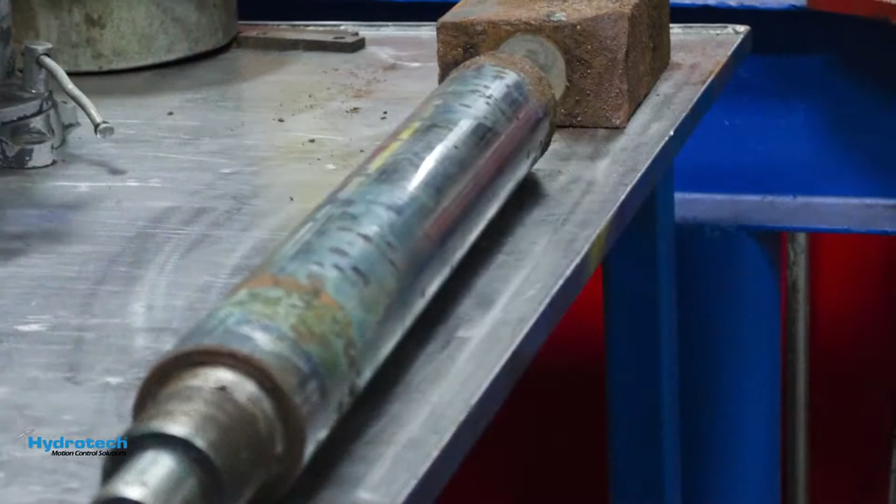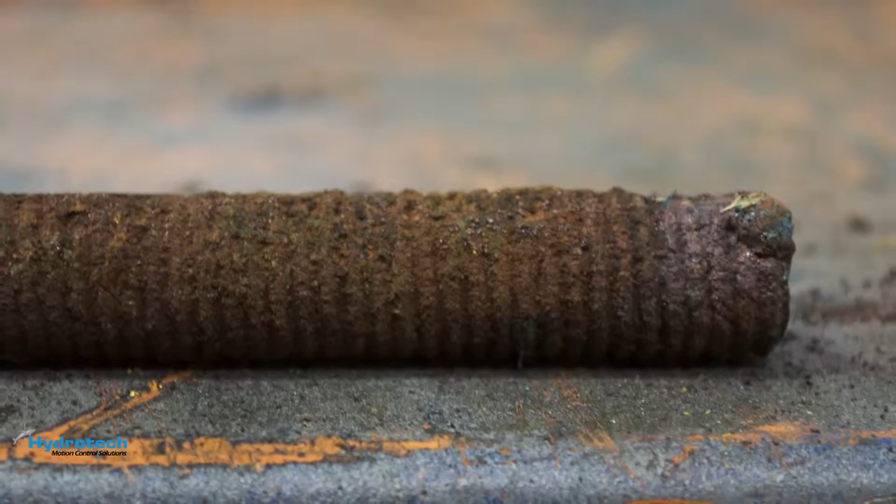The cylinder was crucial to his company's manufacturing process. Without it, an essential machine would be down, costing money and slowing down the completion of jobs for paying customers. To further complicate the situation, the original cylinder manufacturer was no longer in business, which left the customer with limited options for repair.

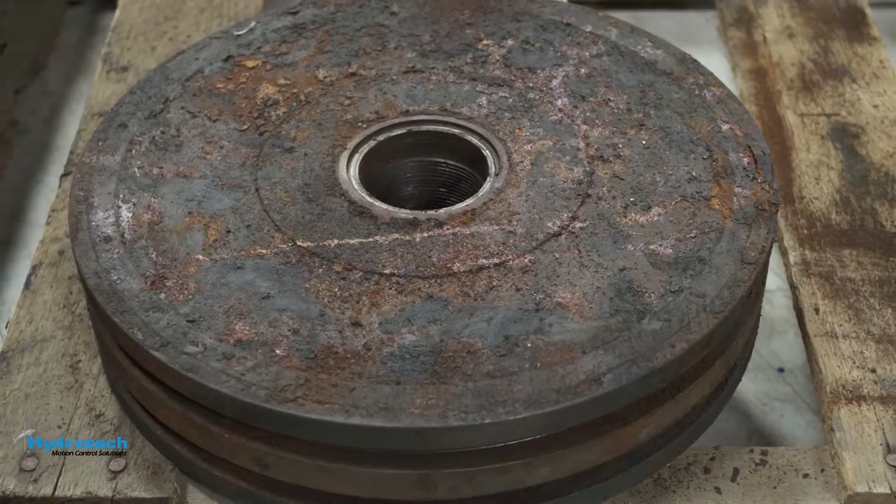Purchasing a new custom cylinder would be expensive. A new hydraulic cylinder generally costs three times more than the cost to repair an existing one, so repair was the obvious preference. Fortunately, Hydrotech Incorporated's service and repair division was fully capable of remanufacturing the custom cylinder.

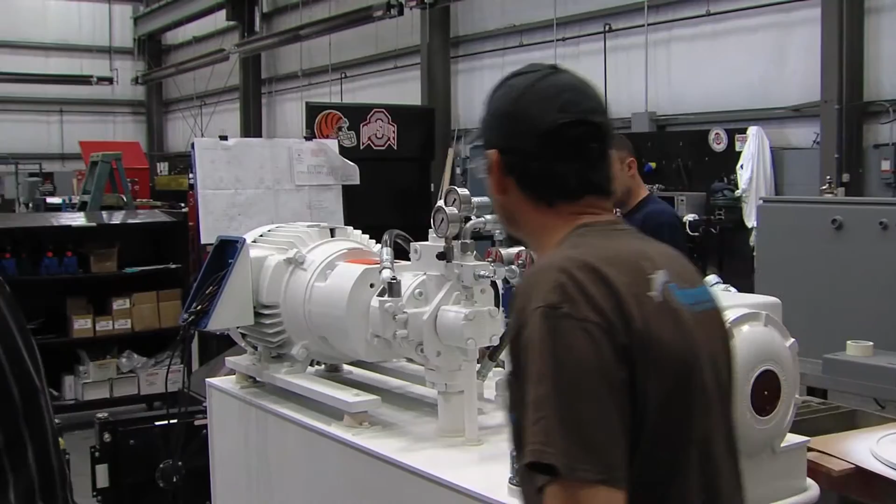Not only do we do the engineering side of it, but we also do the distribution side. We do a lot of integration between the products and the controls for a complete turnkey solution. We're involved in not only design and assembly, but also installation and commissioning of systems.

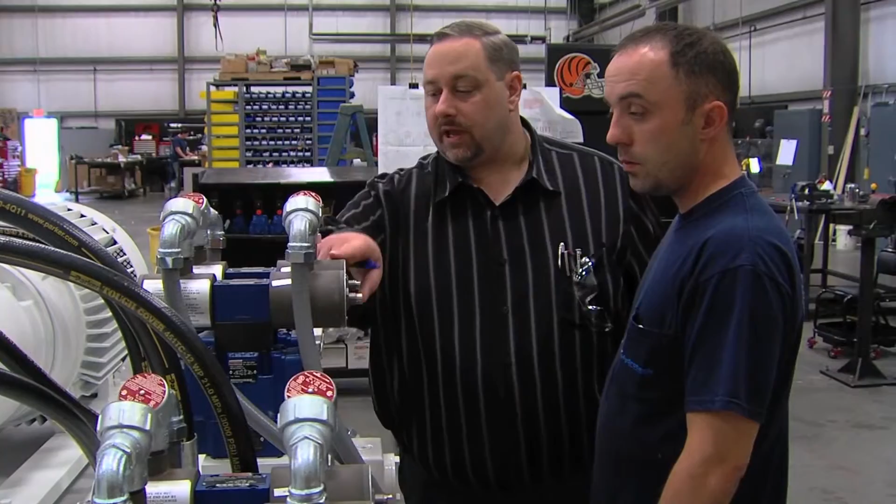So we try to work very closely with our customers, and it's to their benefit and ours to partner in the final solution. We understand that performance and value is really what's important to our customers. We have to help them set themselves apart from their competitors, and being creative and innovative has kind of been in our DNA since the beginning.

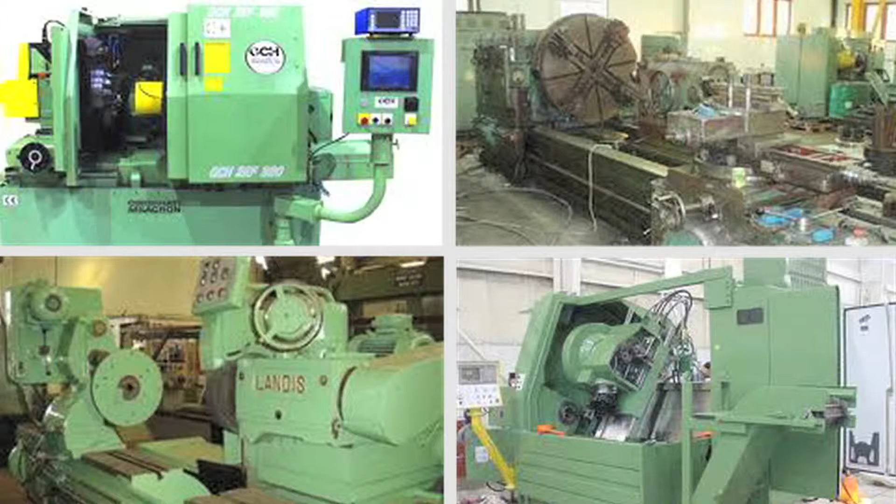I started Hydrotech on April 8, 1967. When we first started, it was just a sales company, and of course early on I was the only employee. The major industry in Cincinnati at that time was machine tool, so I focused in that category.

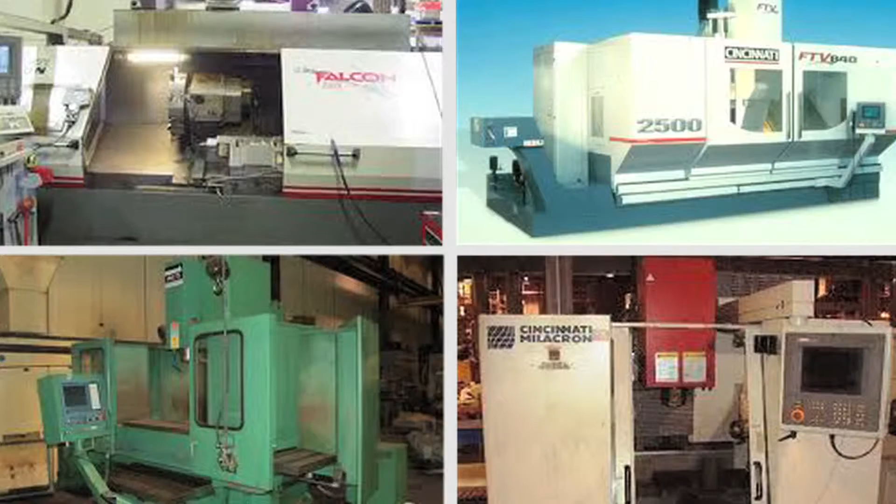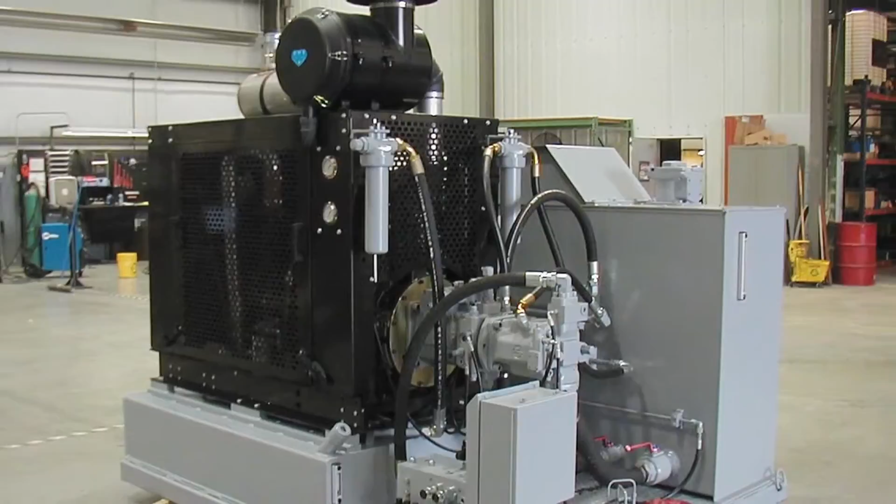Initially you start out with product lines that aren't well known, and then if you have some success, other manufacturers start to notice and approach you wanting representation of their products. That was the stair-stepping to get to more familiar product lines and growth. That's what really moved us into the systems arena, and it continued to grow from there.

Hydrotech is a regional company. We operate in Ohio, Kentucky, some of the border counties of Indiana, and also the border counties of West Virginia. This facility here is about 50,000 square feet. We have another stocking facility up in Cuyahoga Falls, fully staffed, that can do the same operations we have here.

As a matter of fact, one of our divisions, DHP, which is the compact power packs, is based out of our Cuyahoga Falls facility. That's where all the manufacturing for that particular division is. DHP was developed because we realized there was a niche market for small power packs.

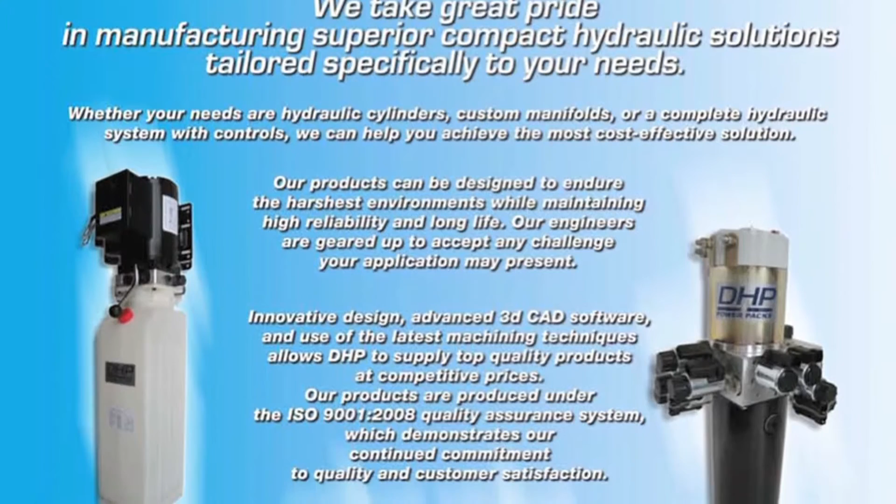So we focused on a market where we could do a total unit as an integral part of a particular operation or machine, and the progress has been nothing short of phenomenal. We started out mainly in the fluid power end of it, the hydraulics and the pneumatics.

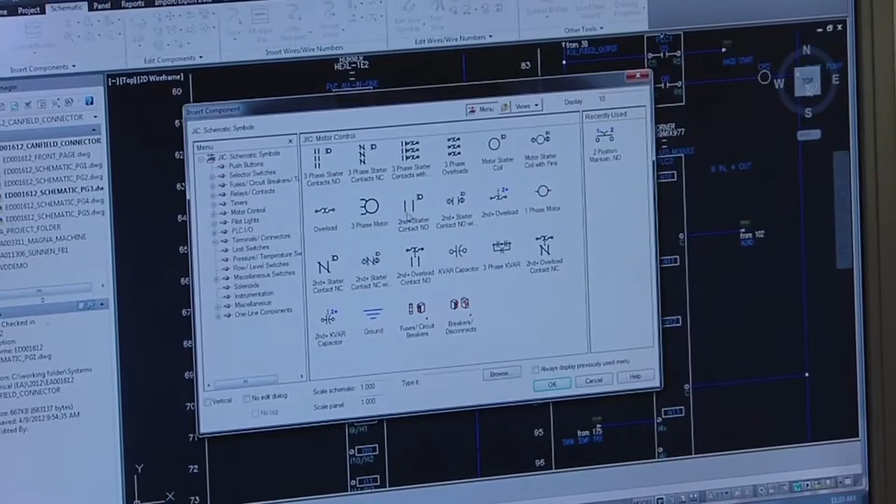But now that we have all of the technologies and disciplines, both hydraulics, pneumatics, electronic motion, and the controls, what we say is if it moves, we can help. The technology change in this industry is similar to what you'd see in the computer industry, because computer controls are being applied to the machinery we are designing for.

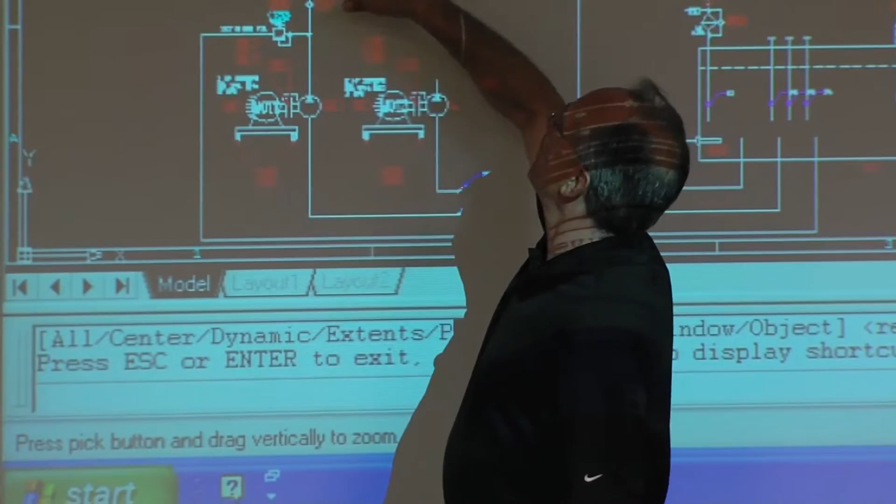So what we do here as a company is have our engineering staff involved in an ongoing training process to understand the new technology, and how we want to apply that to create energy savings for our customers and reduce our carbon footprint. A lot of the new products and new technology is designed to be able to do that.

Environmental concerns here at Hydrotech are very important, and we've taken some initiatives in the way that we operate to become greener. We changed all of our lighting systems over the past few years.

We're on a recycling program and looking at what's necessary to get the ISO certification for being a green business. But it's also important that we have expertise we can provide to our customers, because that seems to be more and more important today.

When the initial customer contacts Hydrotech, it's either directly here in this facility or through sales. Typically it's through sales. We have a project management system, a software program written by Hydrotech for Hydrotech, completely proprietary. Everything we do from the initial contact goes into that project site, and a project is created. Every bit of communication and information associated with that project is recorded within the project site.

So all of the drawings, all of the discussions back and forth between the sales force and engineering, all of the discussions between engineering and the customer, any meetings generated in relation to that project, are all recorded within that project.

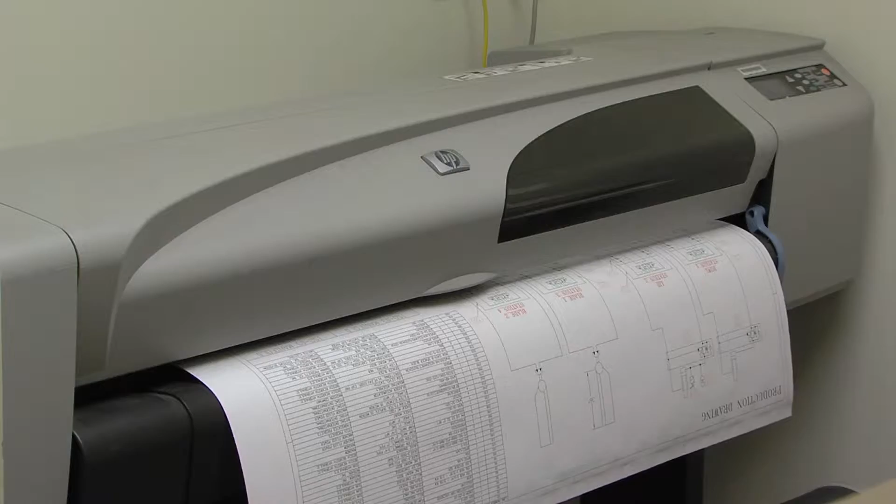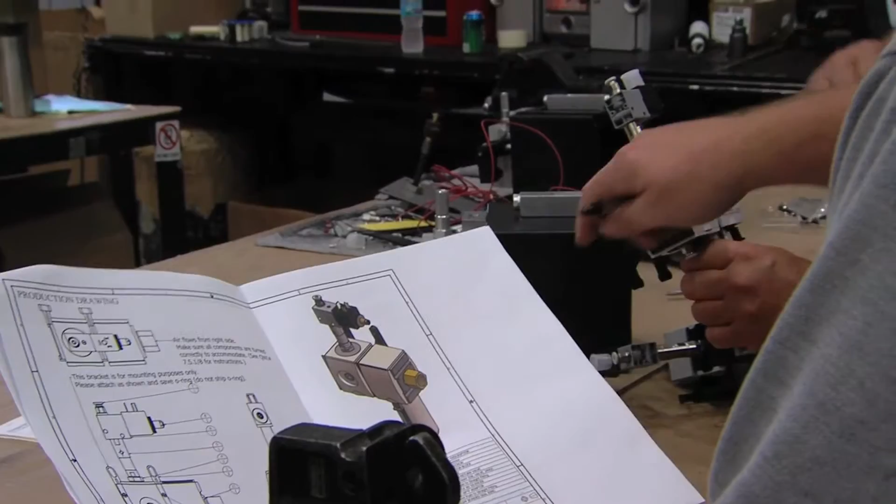From that point, we generate a quote for our customer, and once that quote has been accepted, we generate a set of drawings for that particular system. Purchasing gets involved, products are purchased, and the drawings are released to our production department to be built. From there, we do a complete test and runoff here at our facility prior to shipping to the customer. And we provide installation at the customer site if they require that.

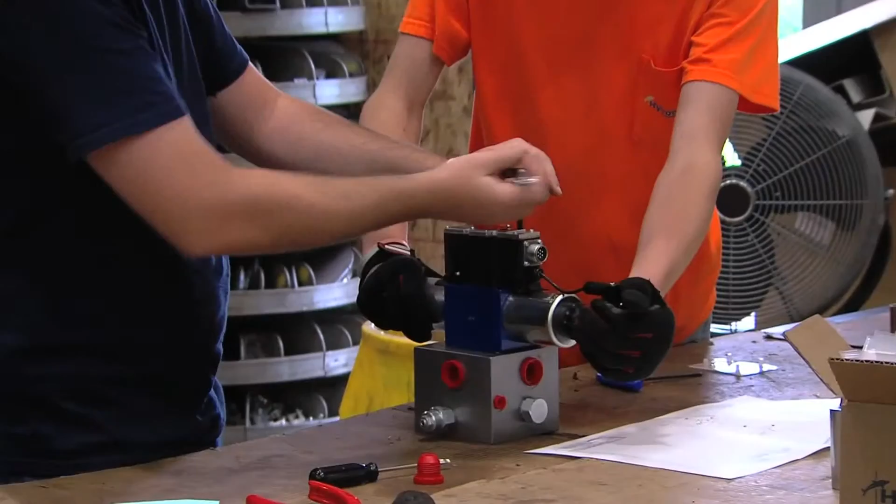With Hydrotec's manufacturing, there's really nothing we cannot do. Anything a customer needs, we can manufacture. We work with a lot of other vendors, and we can design custom manifolds, custom rails, custom power units. We can do full install, and also service and repair, with the ability to troubleshoot.

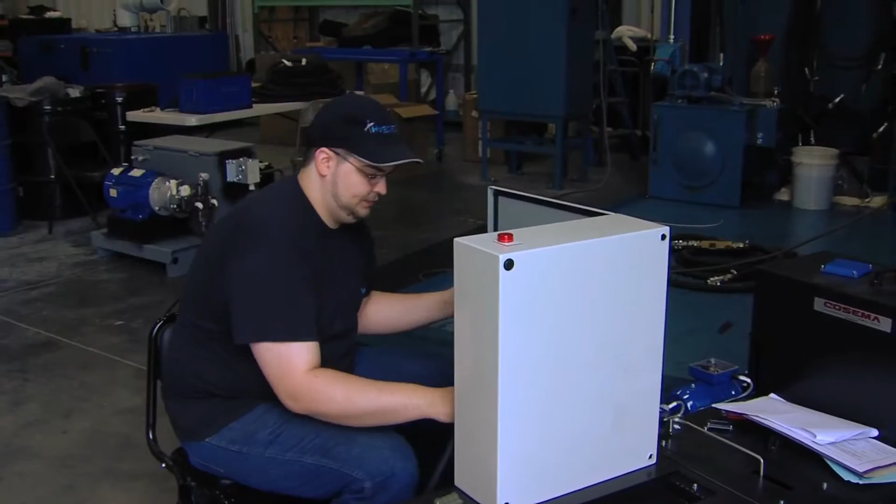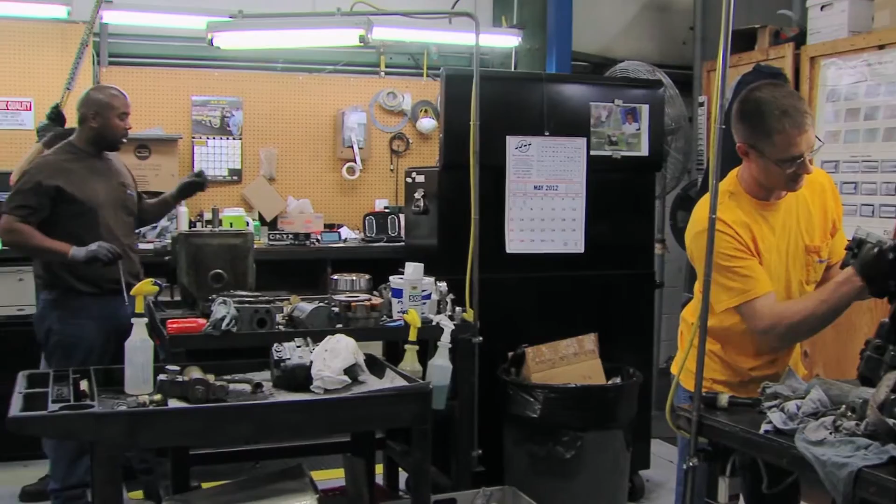We utilize both our production staff, because some of our production gentlemen have an installation background, and our service technicians because of their troubleshooting capabilities, to make sure the system is running efficiently. We also repair product here, valves, pumps, controls, that type of thing.

Hydrotec is always concerned about our customers being successful, and the role we play in their success is getting involved with their engineering and technical people to help them better understand how our products can help them achieve the performance they want in the most efficient way possible.

There are a lot of different training opportunities we provide here. For the customer, the benefit is the opportunity to come here and have us direct our training toward them in the products they're applying, so they fully understand the Hydrotec product.

So we become a value-added source to our customer by being able to provide a complete system, which eliminates the need for multiple vendors, since we can provide the entire package as one. We're also a distributor for key brands like Lincoln and Sun Hydraulics, so all your needs are met with really one phone call to us.

Our average tenure at Hydrotec is about 17 years. That speaks volumes about the people who own and run this company, and the dedication employees have to those individuals. We pride ourselves in making this a place where people want to come to work in the morning, accomplished through communication, fair dealing, and respect for their abilities.

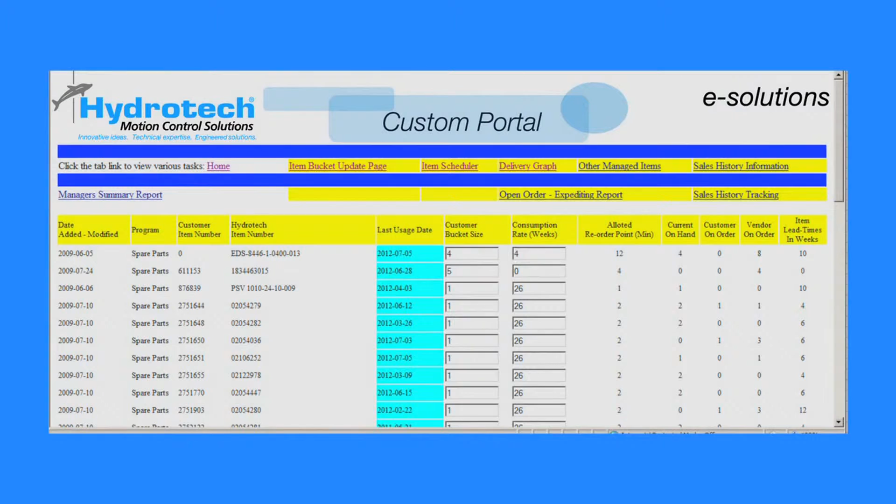Hydrotech's future is extremely bright. We've just gone through strategic planning to refine where we're heading over the next five years. We're setting up custom portals for each of our customers so they can interact and correspond with us 24 hours a day, 365 days a year. I'm very confident of our position, achieved through a lot of hard work, planning, and focus.

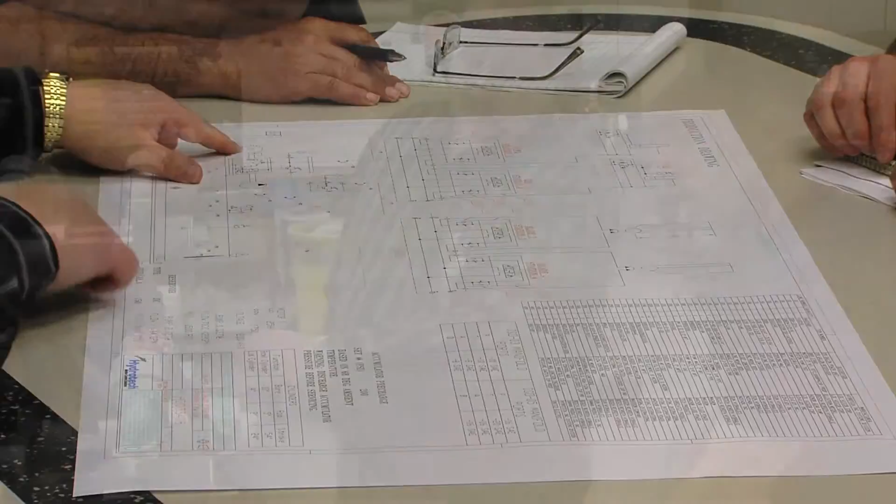At Hydrotech, we not only care about our people's success, but we really care about our customers' success, and we'll do anything we can to ensure that for them. Our goal at Hydrotech is innovative ideas, technical expertise, and engineered solutions for the benefit of our customers, for both their success and our goal of being a partner to our customers.

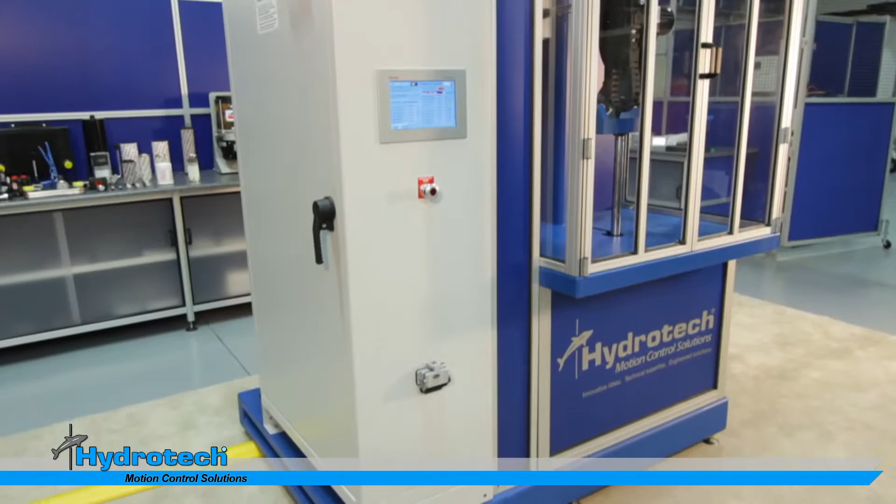The design of the unit is very clean. It looks very simplistic, but behind all the blue panels, there is one heck of a lot going on.

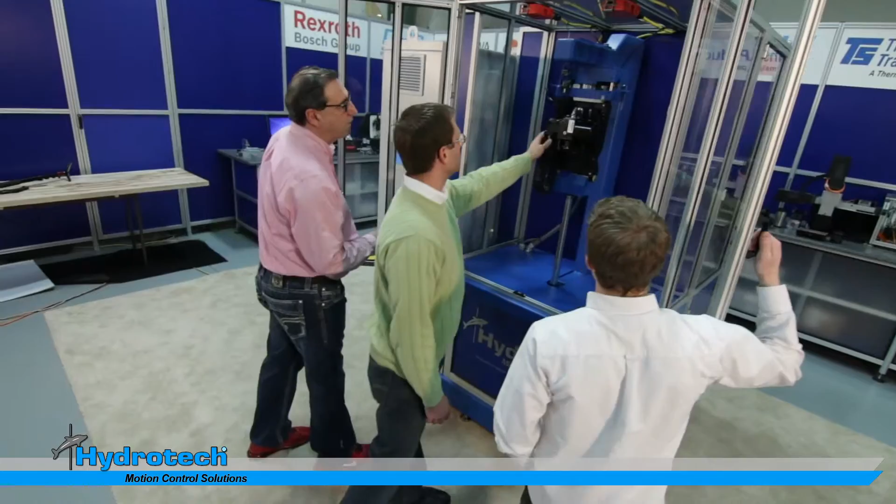In our design process, our objective is to try to develop the smallest footprint possible to complete the testing we're trying to accomplish. One thing unique about this particular test stand is that all the technologies that Hydrotec has are in it. Our engineering team was involved, our assembly team, automation, filtration. There isn't much that we do that isn't in this particular package.

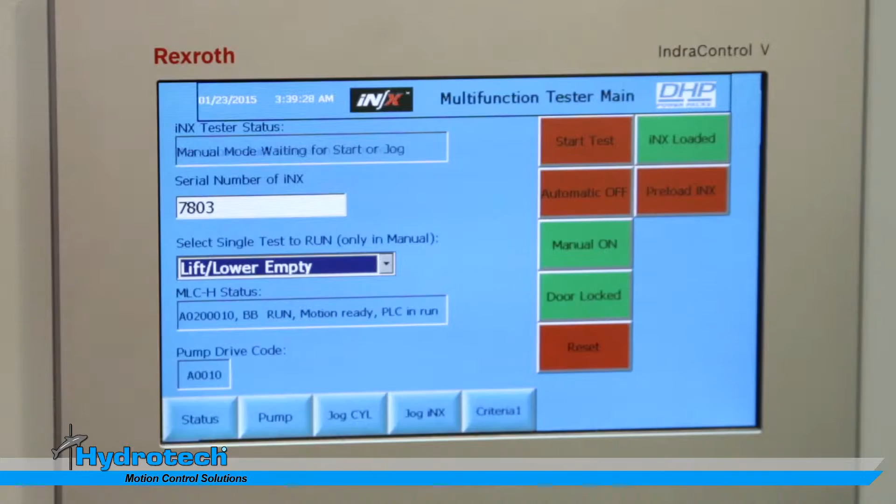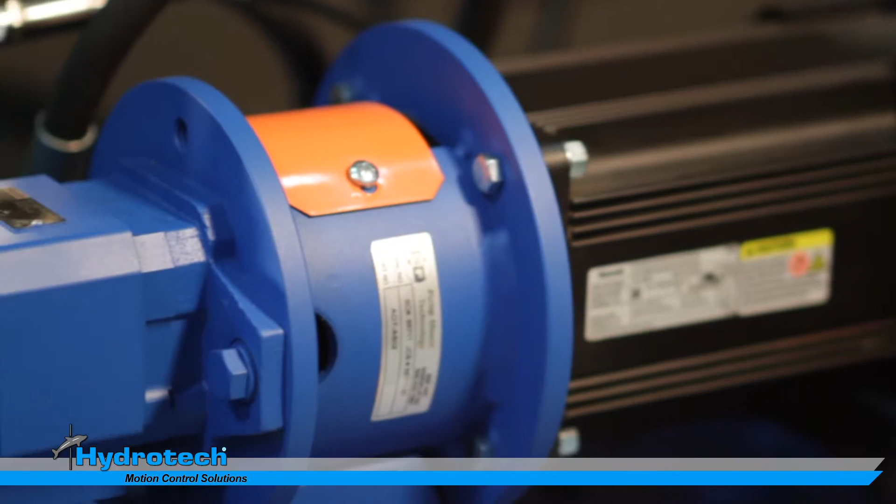What we've done is we've utilized several different technologies. From the control standpoint, the MLC-H, which is a motion logic controller with a hydraulic axis. We also utilize the SVP technology, which is an energy savings, quiet, low heat technology. We couple that along with a force feedback device on our hydraulic cylinder that is feeding position, velocity, and force back to that motion logic controller and closing that loop.

So we're utilizing all these technologies to give our customer, our end customer, the greatest benefit.

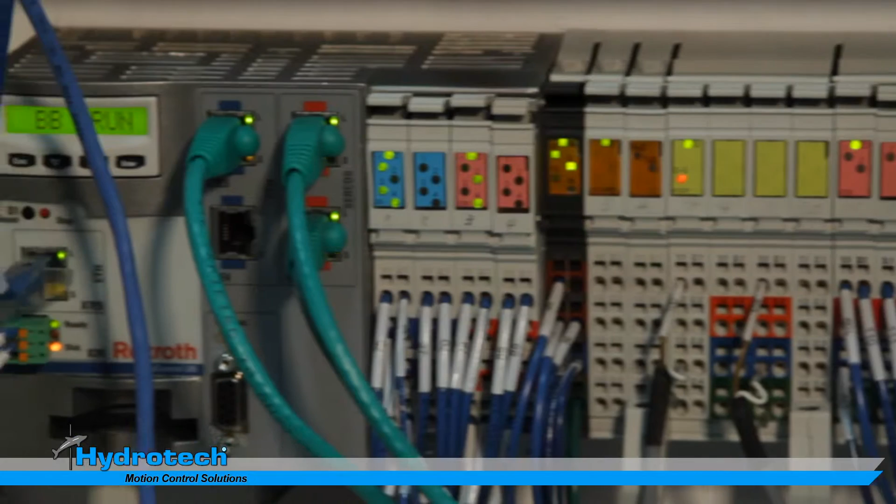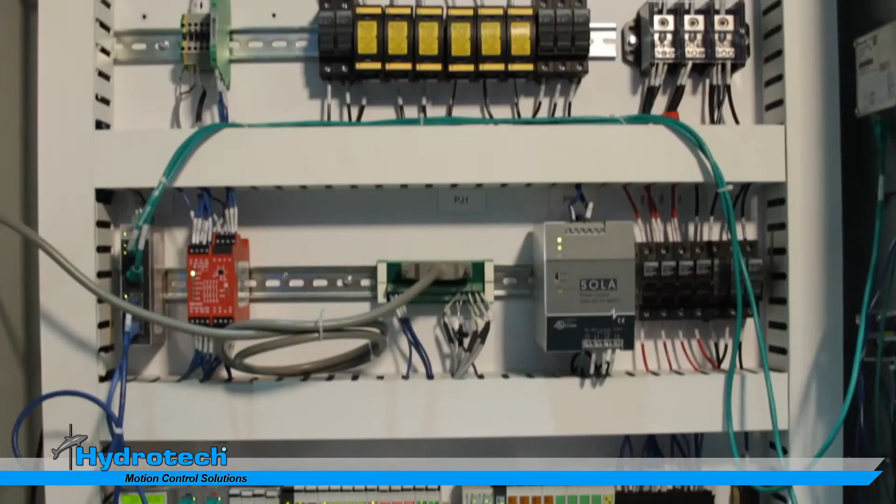The main features of this test stand reside in the technology that we're using from one of our major suppliers, Bosch Rexroth Corporation. Primarily, the system uses their motion logic control system, which features new technology from Open Core Engineering. It also will allow for servo motion control with the traditional servo axis and hydraulic combined. That is very unique to their solution.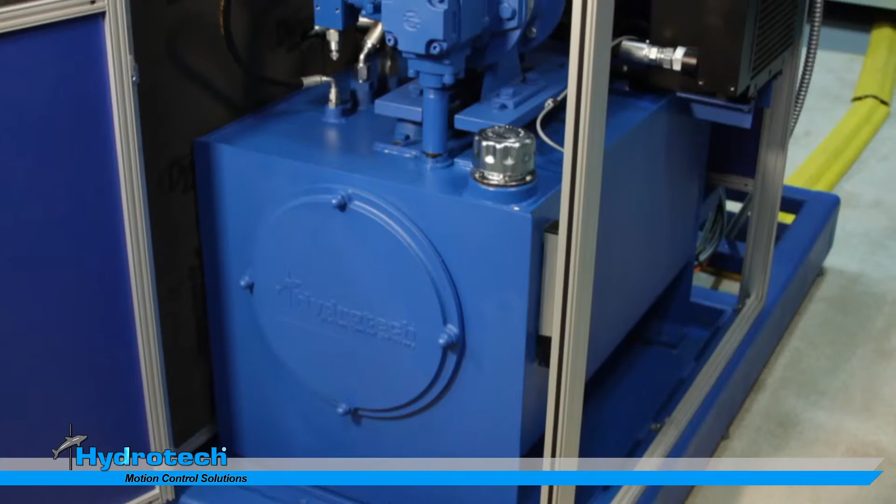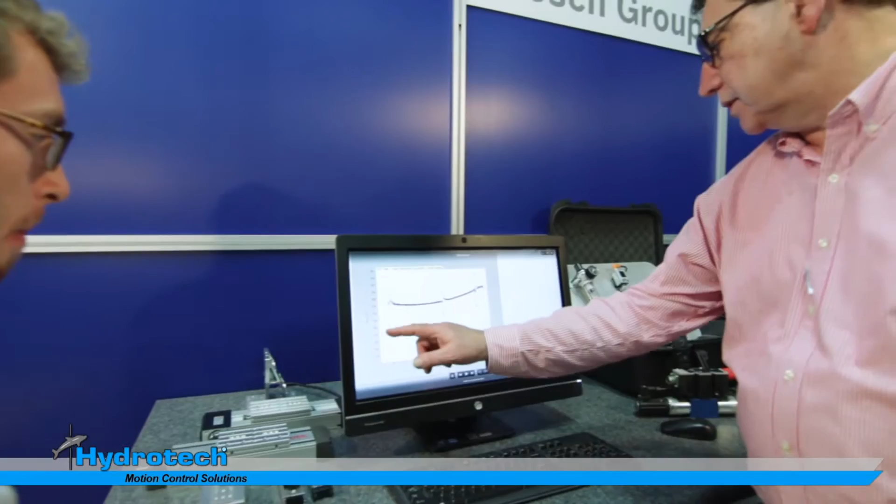There's also other technologies involved with the servo drive system, such as safety on board for machine safety. Open Core Engineering basically opens up the core of the motion controller with a direct interface to common software platforms. In this case, we're using Java to feed back the information to our servers, and that allows other customers to get that data real time.

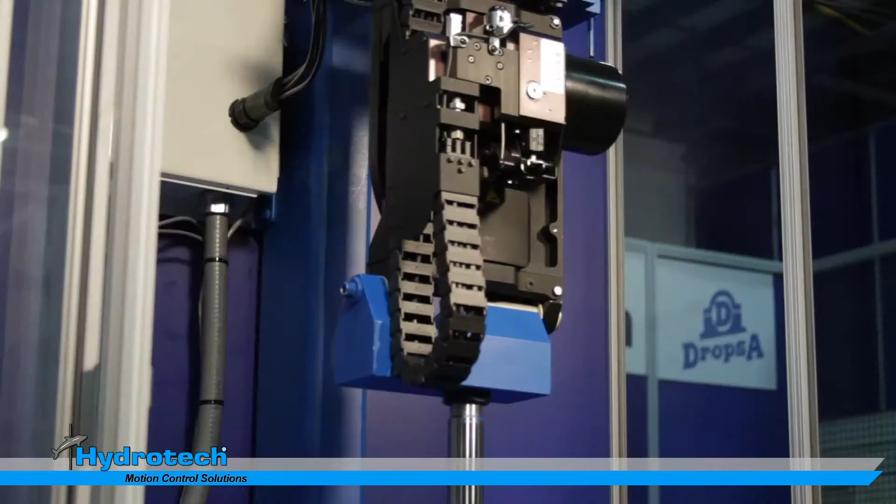We've built test stands for customers to perform the same types of functions, and we do all the programming, exactly what the customer is looking for to simulate applications. And it's helping our customers achieve the quality that they're looking for. It's a great example of all the technologies and capabilities that we have here.

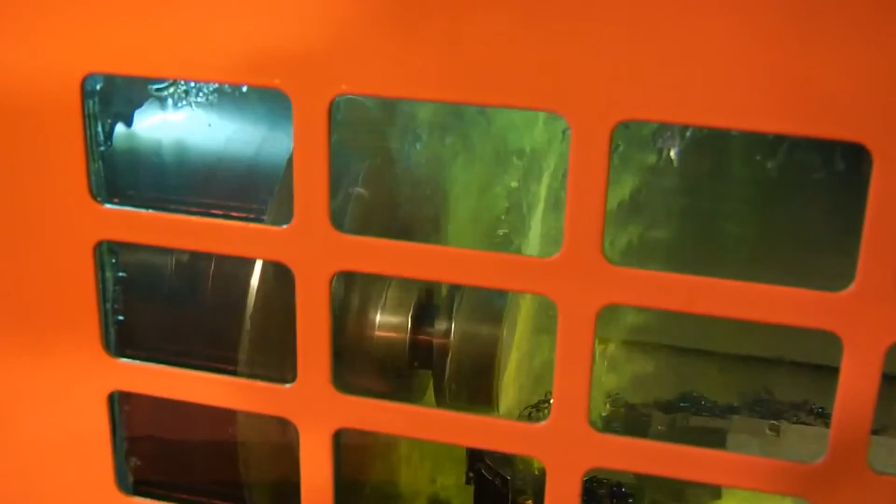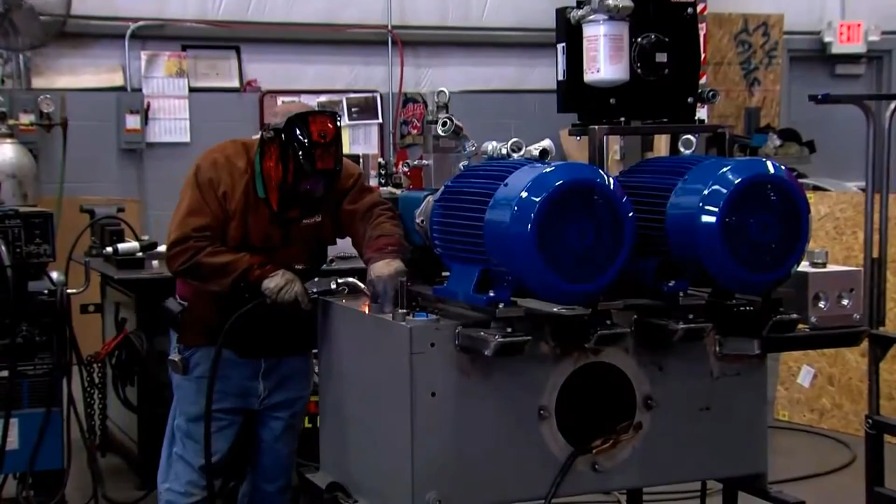Whether your process requires high volume and flow rate, a systemized lubrication system with external valving, specialized heat transfer, or a custom power unit designed to provide maximum motion control and integration to your pump motor group, you can count on Hydrotech to ensure that your system will stay up and running with the best solutions for demanding hydraulic, pneumatic, motion control, and fluid handling applications.

Hydrotech Systems Group is the leader in providing you with production efficiency based on custom solutions built with the most dependable components for your application. 40 years of problem solving has helped us establish a well-rounded knowledge base across a wide range of industry. With the Hydrotech solution, we give life to your machinery and equipment in many ways.

The process starts with the Hydrotech Systems team working closely with the customer to identify all of their production requirements. Everyone's process is just a little bit different.

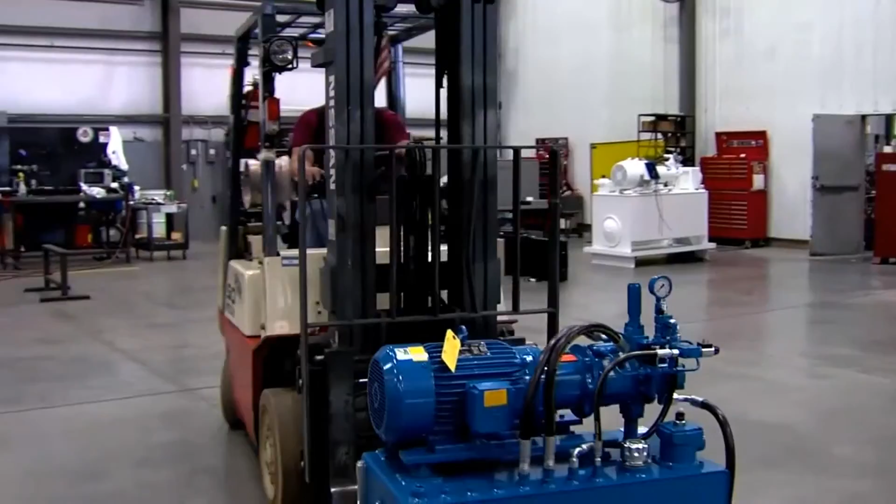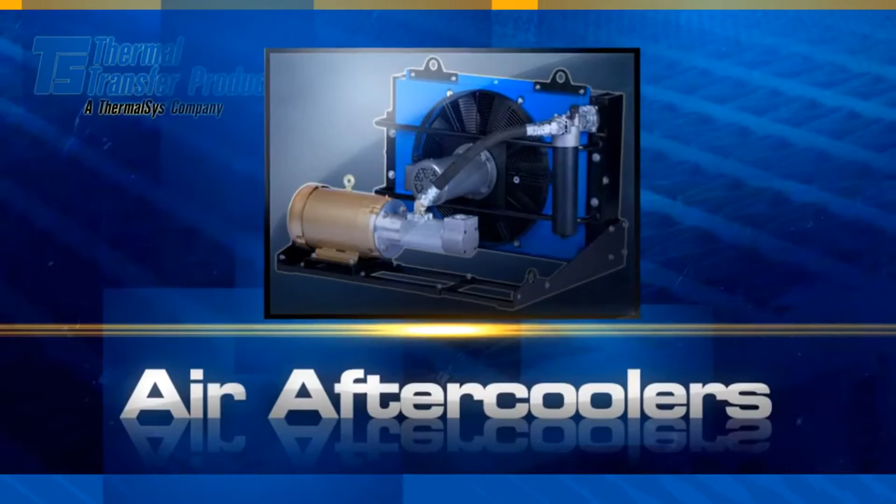Hydrotech power units are built with the finest components available on the market. One such line is that which is offered by Thermal Transfer Products, who provides Hydrotech with high-efficiency heat transfer components and systems. Whether the customer application requires hydraulic presses, injection molding, any sort of air-to-air aftercoolers for rotary screw, centrifugal, air compressors, or vacuum systems, Thermal Transfer Products can cover a wide variety of industrial process applications used in daily plant operation. They service a wide range of manufacturing, including mobile hydraulics, industrial hydraulics, compressed air, and many process industries.

Hydrotech power units rely heavily on the maintenance and performance advantages of Thermal Transfer Products solutions. The real advantage of that partnership we have with Thermal Transfer is being able to contact them to meet not only our customer needs, but our personal needs. We deal with a lot of customized solutions here at Hydrotech, and we have to have the ability to adapt. So we're able to contact Thermal Transfer very quickly and come up with a solution and really work together to ultimately have a project that the customer is happy with.

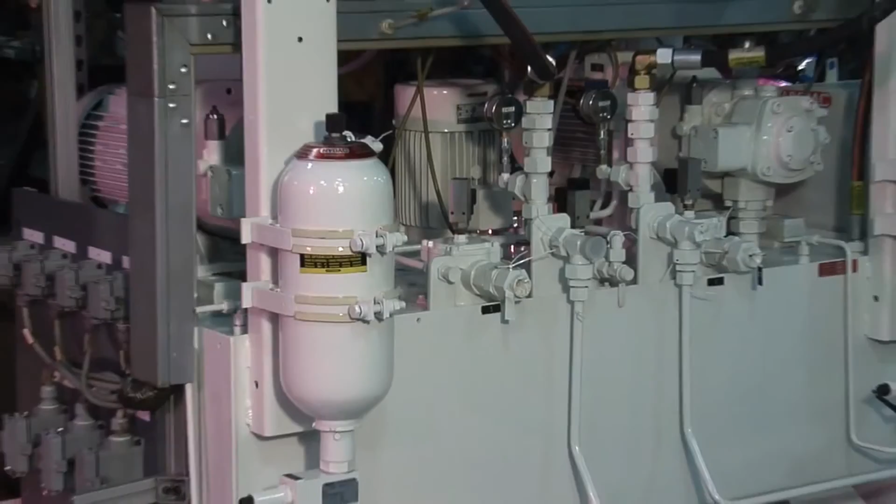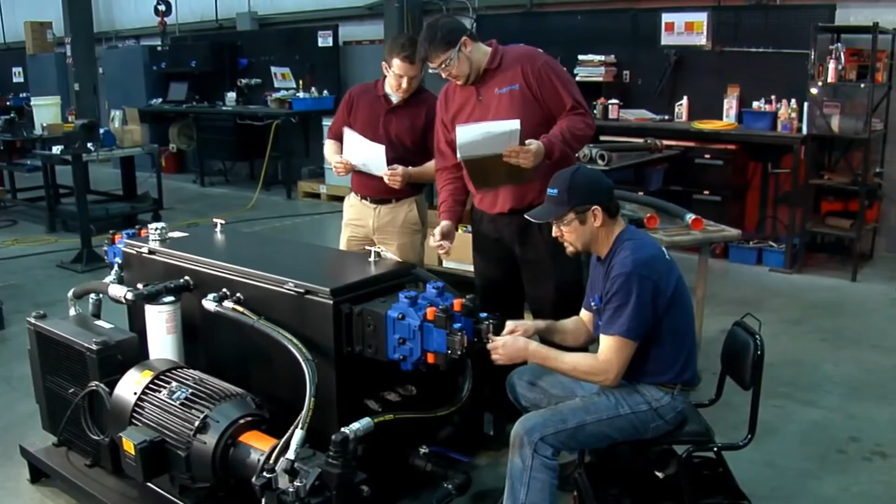Hydrotech power units are used in a wide range of industrial markets. By having a capability for complete integration, Hydrotech power units provide customers with maximum quality control and value. Our qualified tech teams can make sure that your power unit is properly set up, including any special design requirements or accessories that need to be installed.

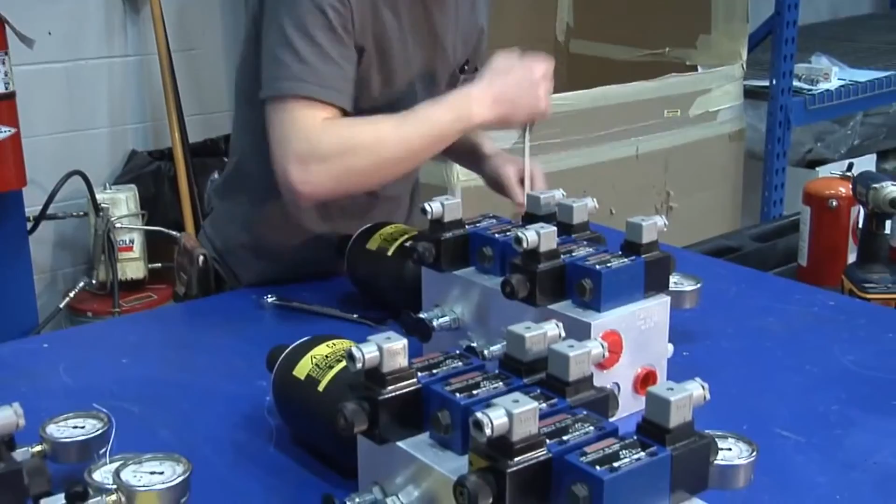Hydrotech also provides training to your personnel on all fluid power disciplines, whether individuals are just starting out in the industry or are seasoned specialists. Downstream, should you need service or repair, Hydrotech technicians...